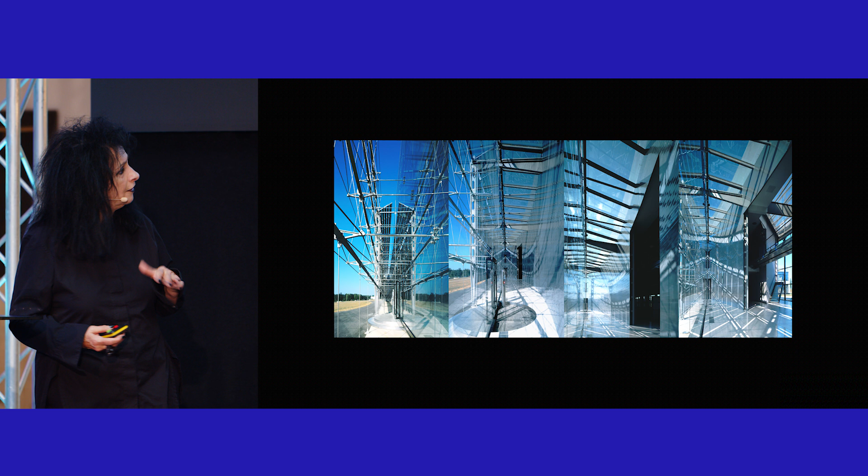So this is the transformation of the space. Okay, I won't explain everything.

This one is interesting because when Nadine talked to me, she said, 'How do you take risk?' I said that I did a competition for the building underneath. The building is a motorway control center, and it was supposed to be under this bridge, in the middle of a park. And I think if people want to enjoy the park, they will pass, and the building will block their view.

So I decided to hang the building under the bridge. But the bridge that was already designed by the engineers—the company decided that it was not possible to do that. So I redesigned the bridge. In the proposal of the building, I redesigned the bridge. And they said, okay, you win the competition for the building, but we have to build your bridge now. And so thanks to that, I got the two commissions—the commission of the building, and so sometimes you have to take risks like that.

You have to invent your way of doing things. You don't have to obey immediately, you have to think and reorganize your way of organizing the project and the proposal.

It's possible to pass underneath this building. And we push the two ways, and it's a big motorway, close to Paris.

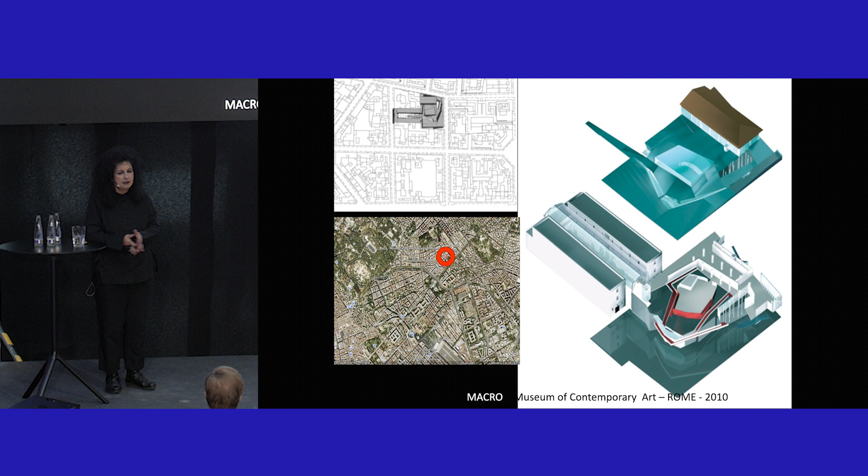In 2010, I won an open competition. Usually I don't do open competitions because it's like playing, sending something on the wall, on the floor. But this time I said, okay, why not? A museum of contemporary art in Rome, where you have all these ruins from Roman times, where everything is protected. This is a challenge. So I said, okay, go on.

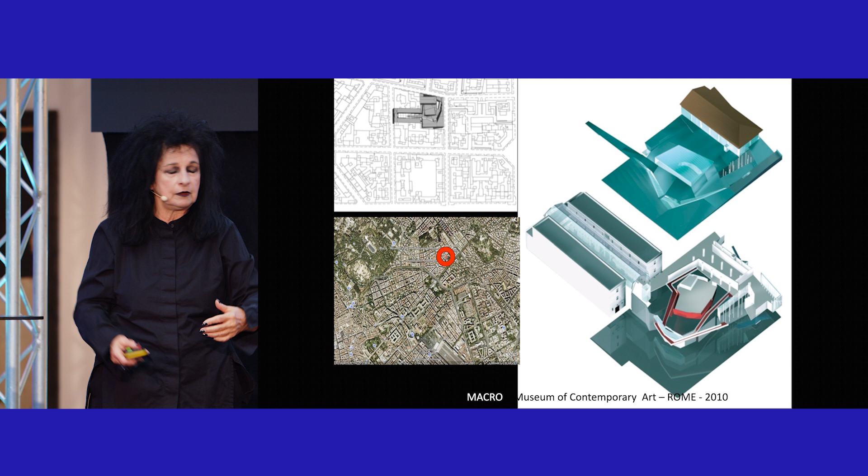So we have to protect and to keep. This is at the corner of two streets. The two bars are the previous buildings that were already renovated, and they wanted to add a big extension. And the extension is at the corner of two streets.

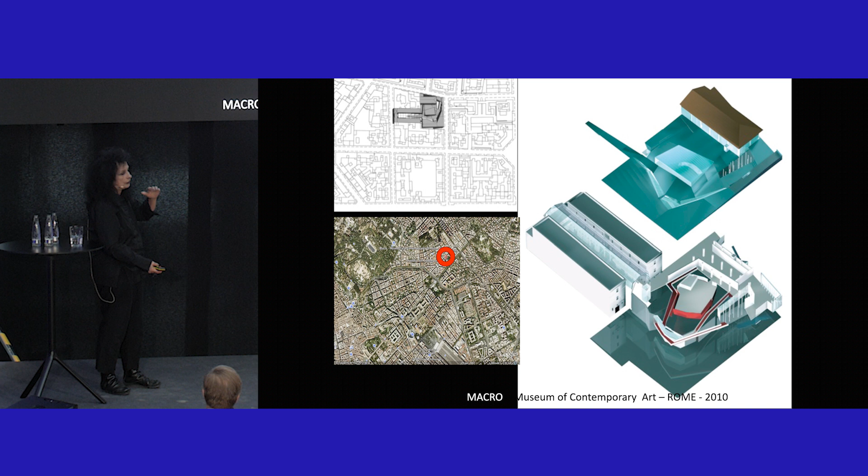I discovered during the visit of the site that between the former entrance, in between the two bars, and the new entrance at the corner of two streets, there are 4 meters difference. So I was thinking that entering by this place gives me the possibility to hide behind the facade, because I had to keep the facade, and give a high ceiling, without touching the facade and without protruding the building above the walls.

And because this is Rome, and I thought contemporary art and contemporary architecture were not really usual in the center of Rome, so I had to take care.

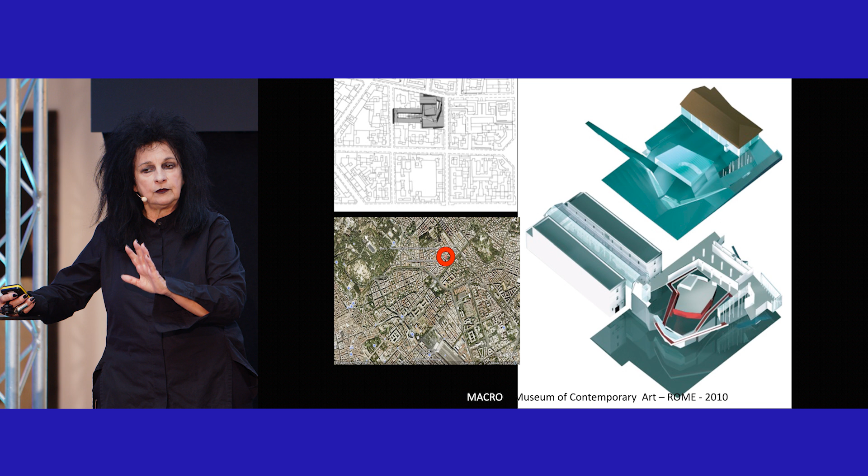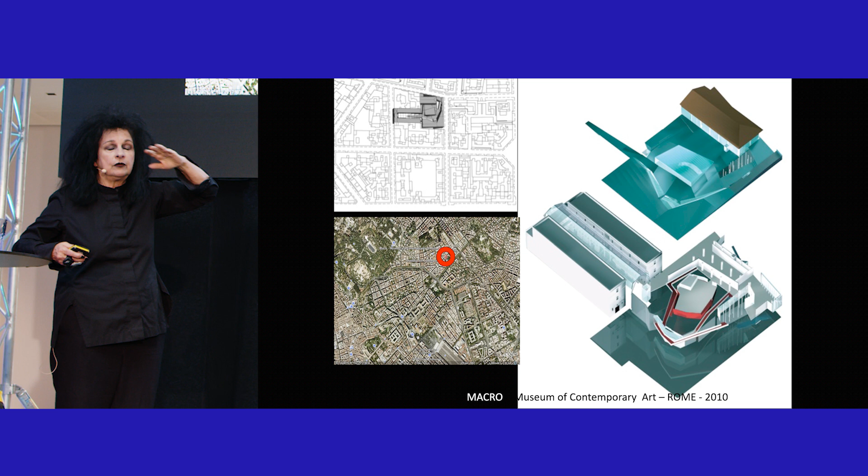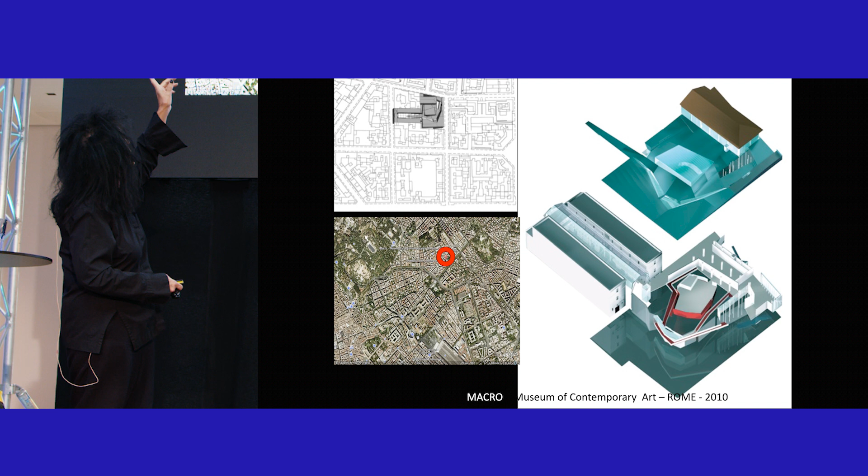By doing that, I created a new entrance, providing a large floor of 2,000 square meters, and above another floor, a terrace of 2,000 square meters, and in between the new extension. I connected the two by ramps in between the two wings, the previous wings, one going up to the roof and one going down, because they are 4 meters apart. So it's now 11 meters high.

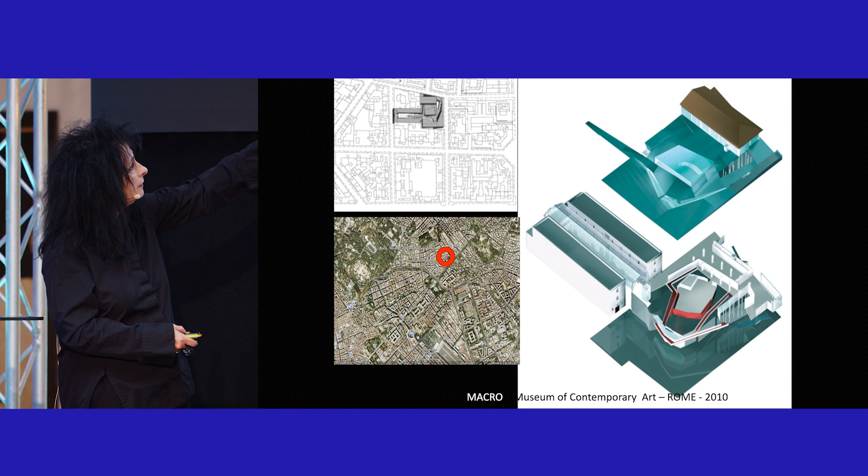This is for the main exhibition room, which is at the angle, the center with the foyer, and above to keep the little roof and the structure underneath that we had to keep.

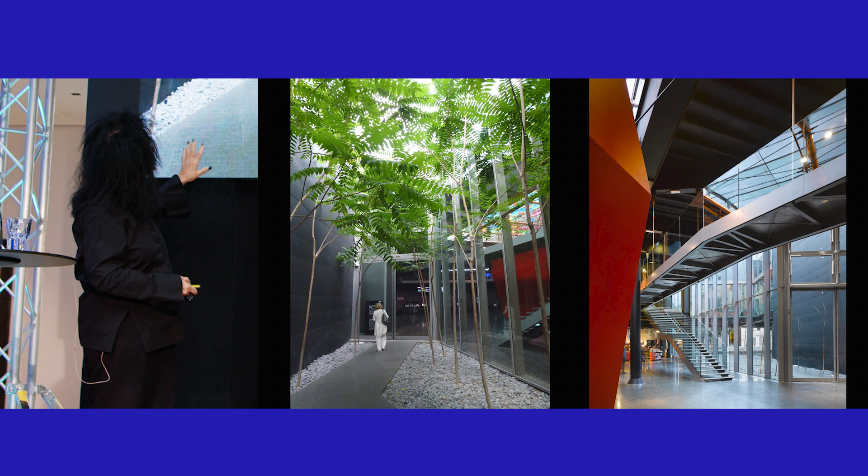So this is the new entrance with the coffee suspended at the two facades that we kept, entering underneath with a garden, entering into another world. So behind the facade, there is another world, which is contemporary architecture and contemporary art.

The passerelles are traveling everywhere at the mid-level of the space. Everything is painted in black, not the exhibition rooms, and we can travel at 3 levels: the floor, with the continuity of the pavement of the street, the mid-level of the passerelles, and the roof, which is another place for exhibition.

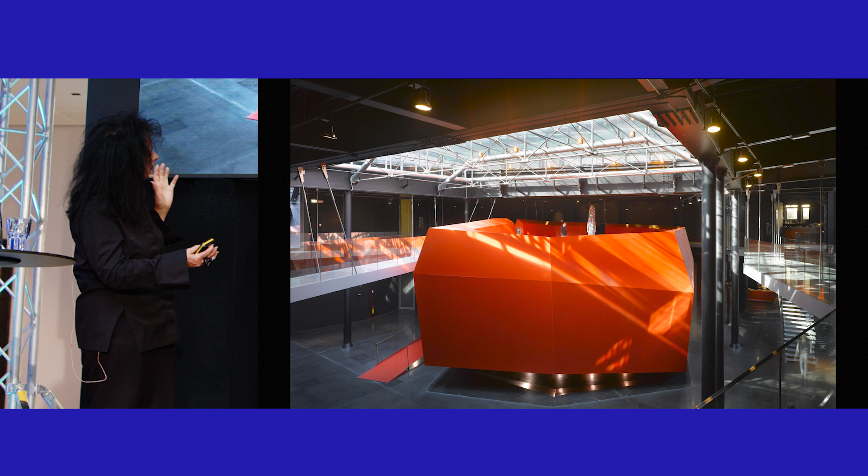The conference room is an object which is a bit destabilized by the shape and the digging of the floor underneath, and it's red, matte red, and bright red inside.

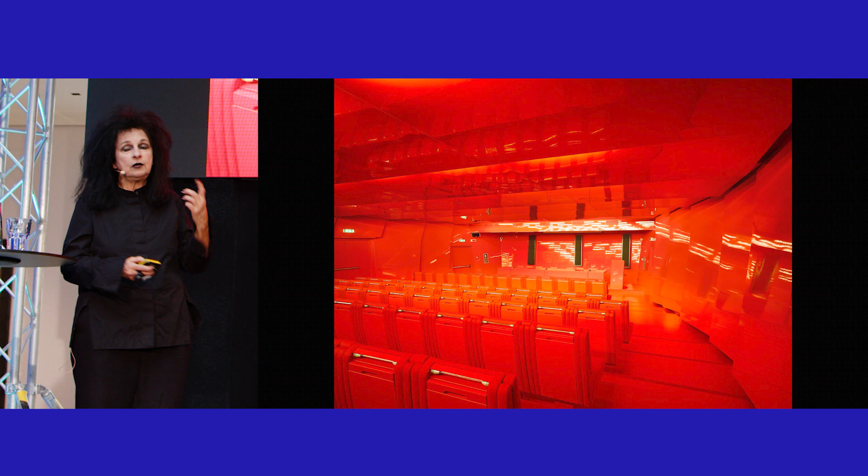At the middle of the work, they asked me if I wanted to design the furniture. And I said yes, because for Italy, it's normal that an architect designs furniture. So I said yes, but can I have a little more money? They said no, you do that within the project. I said okay, because it was a challenge to do that. So I started to design everything: I designed the seats, the lamps, the table behind.

I remembered when I started the project, reading a text, a discussion between Daniel Buren, the French artist, and Frank Gehry when he was starting the Guggenheim museum in Bilbao. Gehry was asking Daniel Buren, do you think a contemporary art museum has to be neutral and white, as Richard Meier was doing forever? And Buren said, no way, you can do what you want, but in the exhibition place you have to be calm. Everywhere else, you can do what you want.

This is why the collective space, the public spaces, are done expressing myself, and the exhibition is for the art. The roof is an exhibition space also, a new exhibition place, with painted walls facing the neighbors to have a projection, a kind of difference of floors, a travel with different surfaces, and glass volumes that provide natural light below, everywhere.

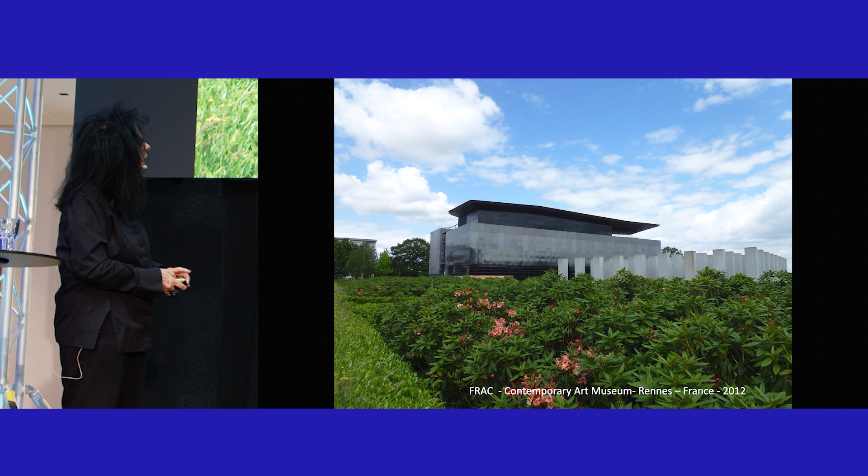So this is another one that I did in Bretagne in France, my region, from where I am. And this is a contemporary art museum also.

And the sculpture in front was already planned, and the artist knew that the museum would come. She gave restrictions to the architecture. She said, I want to have a silent facade, and I don't want the architecture of the building to fight my piece from the building.

So I decided to respect her will, and I did a black monolith building, silent, separated by two materials. The top part covers the facade of the main exhibition room above, and this facade is black mirror stainless steel, because it's black mirror, sometimes it's gray, sometimes it's blue.

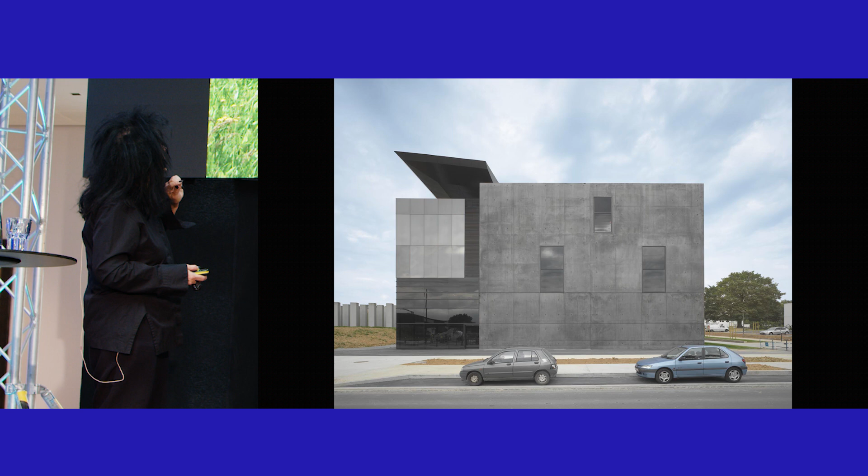Because in Brittany, the sky is changing all the time, so depending on the color of the sky, depending on the weather, this material changes appearance. Below, this is glass, and the line in between them is exactly the same height as the stones. On the other side, this is black concrete. When the weather is dry, it's dark gray, and when the weather is humid, it becomes black. So there are three black materials changing color depending on the weather.

But you enter there, and you can't go in the middle, because you see that there is something, so you have to go there, to go up, you have to travel back to the facade. And the facade becomes transparent, and you look at the sculpture, so you are referring back to where you were. And you travel along the facade, in between the volume of the lecture room and the conference room and the outside. You go to the cafe, open to the park around, and you travel in the middle with some steps, some ramps, some staircases.

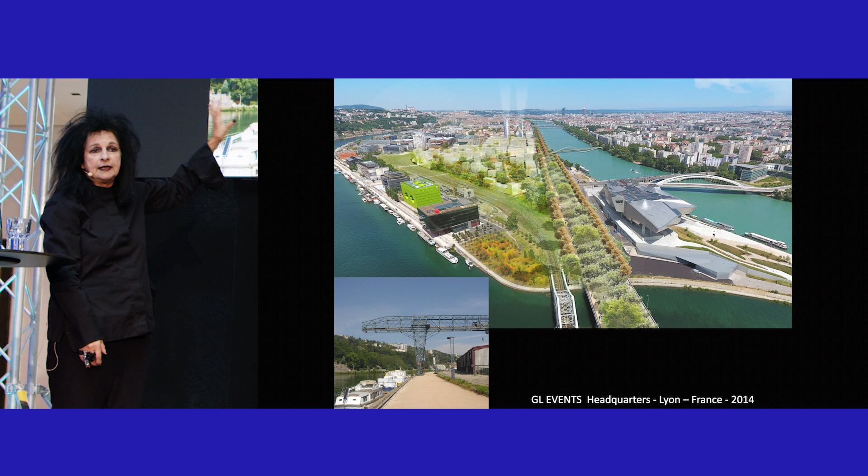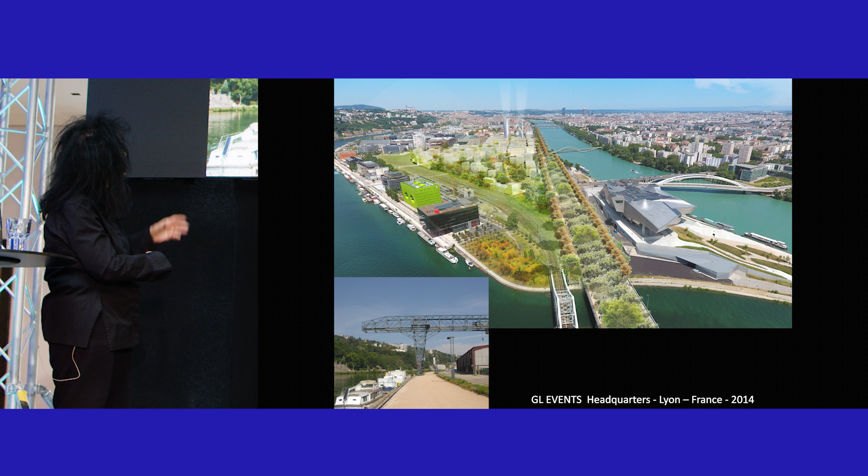Okay, so I also sometimes do offices, buildings. This is Lyon, where we have two rivers, the Rhône and the Saône. It was the former industrial harbor in the city, in the center of the city. And the city in the 90s decided to bring it back and push out all the industry, but keeping some machines, some engines, some very nice structures that were for the transfer of goods between the harbor and the river. So I was inspired by that to do some building, which is the black one.

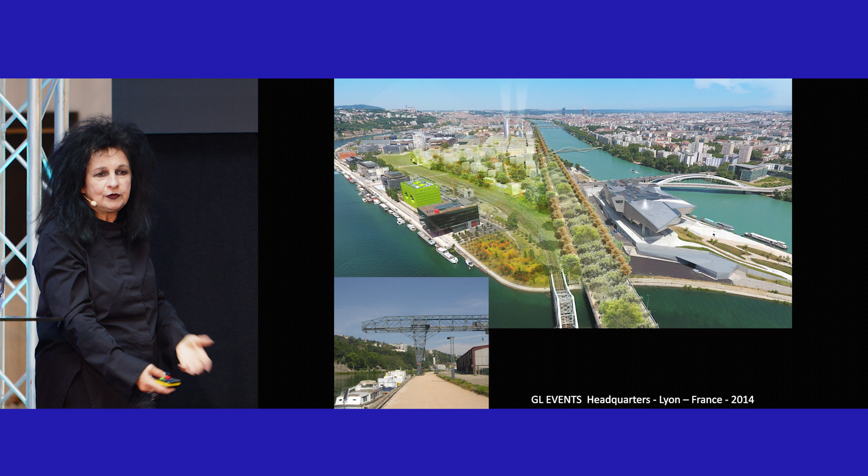So maybe you know this museum from Coop Himmelblau. A big one, big object, 2,000 square meters of exhibition space. My little black object, 8,000 square meters. Difference. You can say what you want.

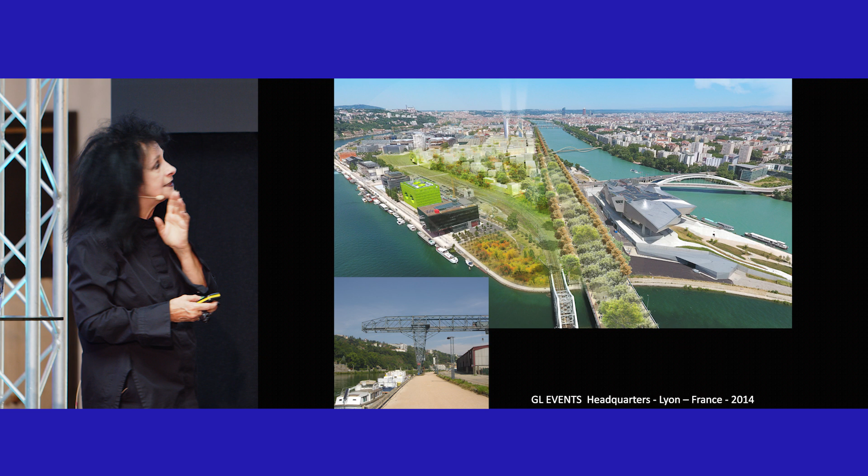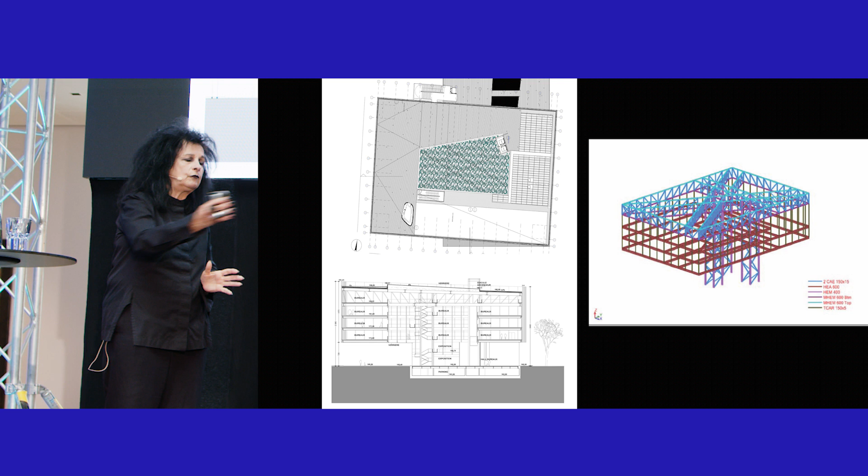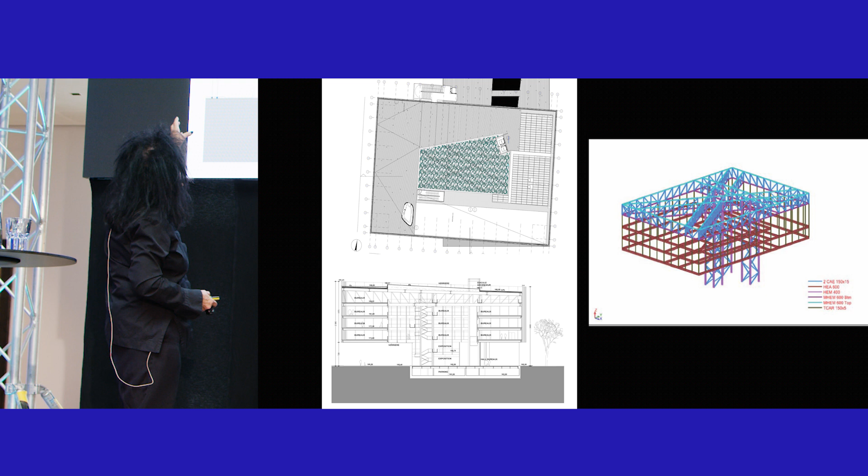So this building, we had a site which is 50 by 30 square meters in dimension. So it's a rectangle, and we were supposed to build on this surface. I decided to twist the top part to bring the offices above the bank, because the river is there, this is the bank, and this is the building, to have a big cantilever of 28 meters long between the beams, the column, and the end of the building.

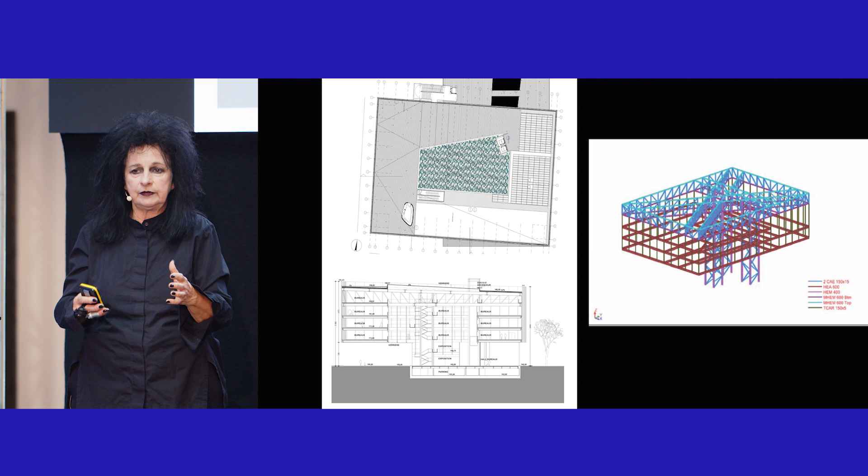So using the top part as a crane, building that as a crane, with only the shaft for the toilet and the shaft to support that, and 3 columns in the middle, 3 pylons in the middle. And these 3 pylons came by boat, and they were built at the beginning.

The concrete shaft was built at the beginning, and the car park one floor below. And we brought all the beams at the top. After that, we started to suspend the floors from the top to the bottom. So from the 4th floor to the 1st floor, it was suspended. They are suspended to these beams, like that.

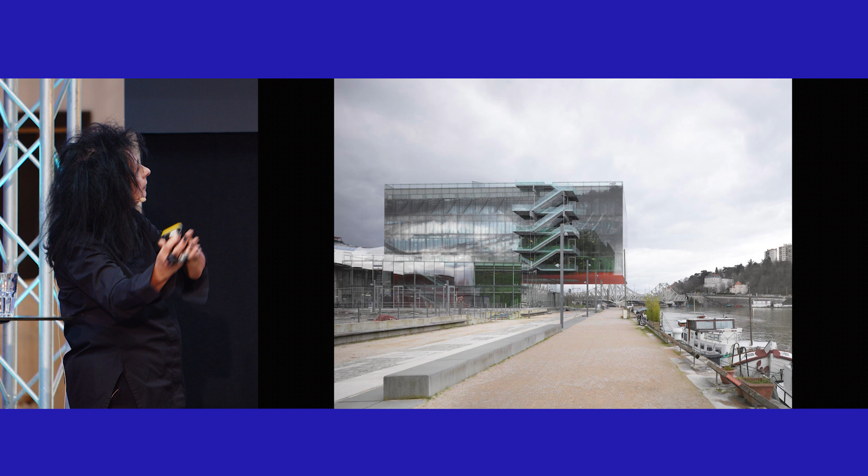The building is really in cantilever above the river bank. And we were asked during the competition to work with an artist, to include and insert art in the building. So I decided to work with an artist, Felice Varini, who is from Switzerland, and he works on the question of perspectives.

I said to Felice, look at my building, it's very simple, this is just two parallelepipeds. Can you change the perception of my facade? And he said, first of all, don't ask, and don't give orders to an artist. I said, okay, I don't give orders to the artist, do what you want.

So he came back to me and said, architecture is arrogant, because when you build on a landscape somewhere, you destroy and erase the landscape that was there before. So with my photo, I took the landscape in a photo and reapplied the landscape on the building. I said, okay, fine, do it.

Now, this is very convenient. For once, art will provide something efficient. Because with the insertion of the photo inside the first layer of the glass, we protect the glass box inside. We have to play with the degree of gray and black, since it's black and white, to have the possibility to protect the building with art, like that.

And because of this cantilever, we turn also the atrium in the center. So the atrium is going outward. So when you are passing under, you see under the building all the way to the top, like that. This is great, you discover the building without going in.

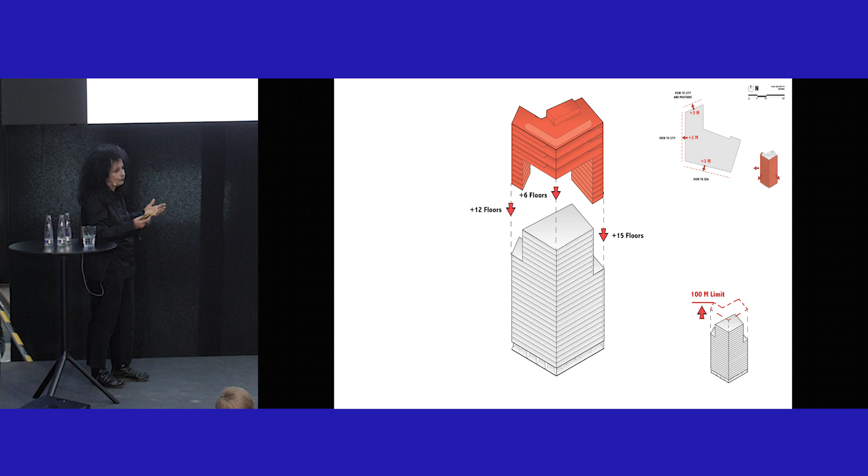This part has a skeleton, but on the backside there is another part of the skeleton. So we had to first destroy the back part to re-add on the top part of this half tower all the floors that were on the backside, and to expand the floors, because we discovered we can have the place for terraces and balconies.

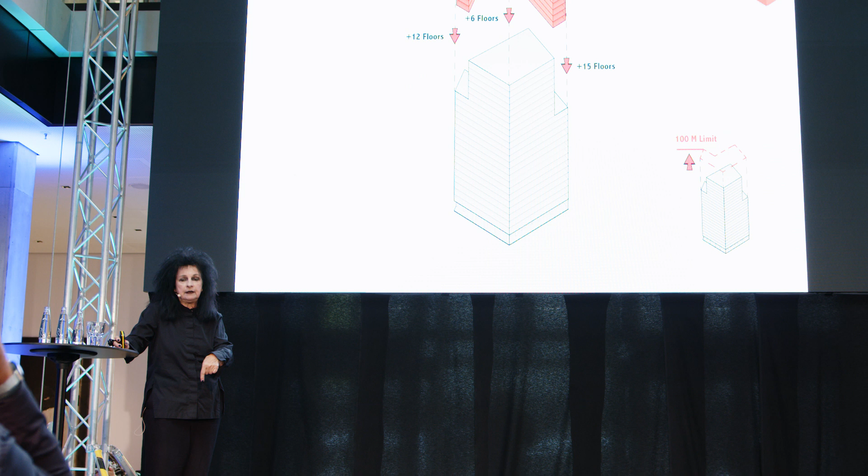So the first work was a very strong structural effort, reinforcing all the structure of the tower, by going down. But down there was a car park belonging to the hotel next to the tower, so we couldn't insert new columns into the car park. So we inserted micropiles into the columns of the car park.

I decided, since it was a kind of a box, not very nice, to give it a new design by creating undulation on the facade with the balconies, by taking out the two first floors to add on top, creating something much higher and more dynamic, more dancing in the street. The top is red because it's Barcelona — you know that everywhere there is red in Barcelona. So it was a signal, with the duplexes and the penthouse on top. The facade is undulating.

The ground floor and the lobby is 10 meters high. By taking off the two floors, we reached 10 meters high. So the lobby is impressive because it's very high.

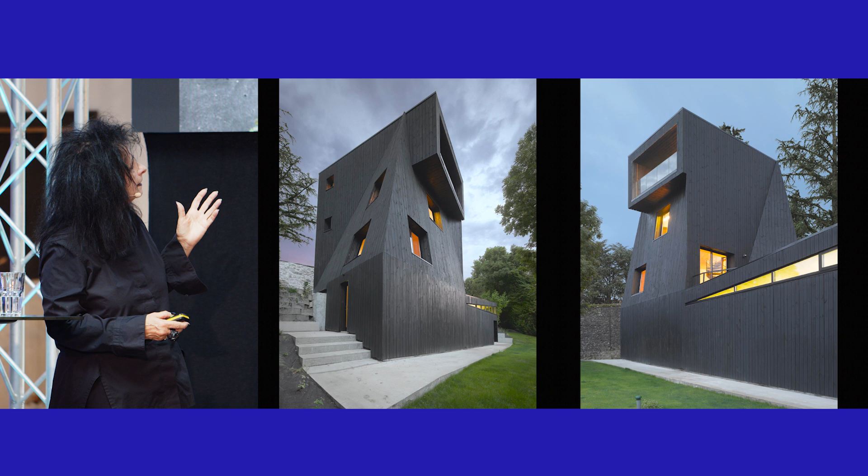Structure, everything is wood, but absolutely silent because there are no windows. But by twisting it, there's the possibility to have some windows, taking the sun for the top part, like that. And below, this is a workshop that is protecting the walls for the gardens.

Inside, this is wood. It's a little space with a living room, a bedroom, and on the top there is a belvedere to the view, to the landscape. So this one is black, totally in wood.

And in Brittany, an English guy asked me to do a glass box, a glass house. So this is a total glass house, white this time, because this man has an illness, a macular illness in his eyes, so his view is disappearing. So he wanted to have something which is totally lit, totally bright, without glare, and totally equal in terms of light, and to be able to live there sometimes.

So this is a double glass filled with a specific material. So it's time, so I run. This is like that, inclined, inside, like that. And another one, close by. This is the top one, with other houses in the back.